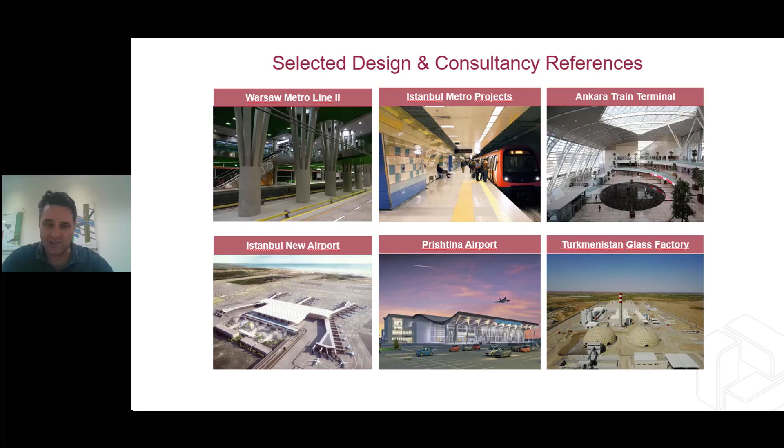Some of the interesting projects we've been involved with over the years: the Warsaw Metro line in Poland was an interesting job. We've done almost all of the metro lines in Turkey - we're one of the biggest providers of design services there. Recently we were also involved with the new international airport in Istanbul. So there's an interesting range of mix of jobs we've been involved with, and this has helped shape the way the software has developed over the years. It gives you some insight into what we're doing in practice, and you can see we're also delivering projects just like you.

So there's an interesting timeline for what we've been involved with. In fact, the office started back in 1985, and we started commercializing software in the early 90s. In 2000, we had what was then the global release of a product called Orion. So we commercialized the software we had developed in-house in the early 90s, and it culminated with a product called Orion, released in the early 2000s.

We were one of the first to introduce bidirectional integration with Revit, being a physical modeling system. We started this process back in 2007, and continued to develop that platform for many years. Then in 2015, we redeveloped the entire suite of products, which became known as ProtaStructure. This has evolved tremendously over recent years, and we're now in a position where we're in the process of completely redeveloping a whole new platform, which we're very excited about and will be launching very soon.

So watch this space. We've got about 300 people on the design and development side of our business, and we support a range of interesting businesses across the world. I think there's over 10,000 people using our platform on a daily basis, supported directly by us and our valued partners in over, I think, 17 countries now, if I'm not mistaken.

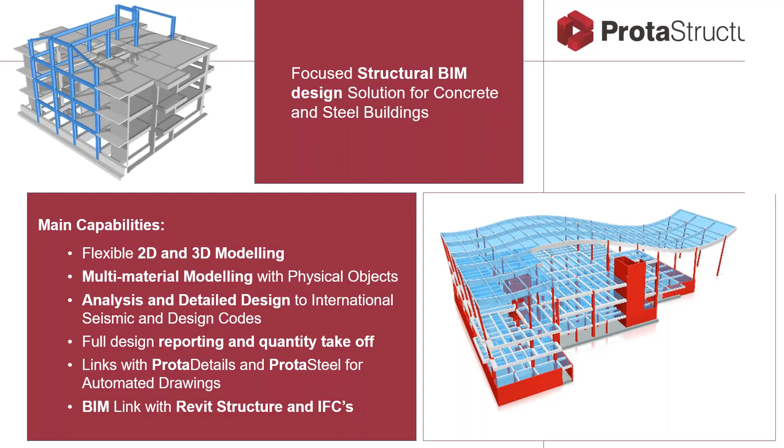Now, I think people like it because users tell us that it's easy to use, and it also helps with driving productivity.

Sorry, I'm getting some messages. I think you can see my screen on the side. I don't know how to minimize this. Okay.

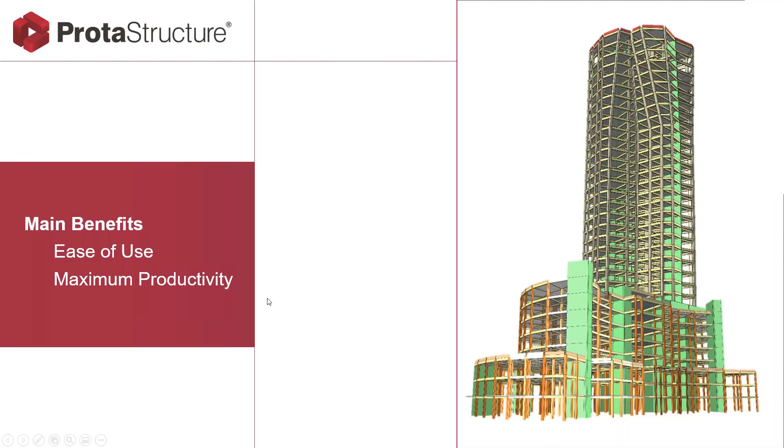Now, just give me a second. I know you can see my screen on the side. I'm just going to kind of maximize it, and then I'm going to try and minimize my screen again and see if you can't see it. Okay. All right. Hopefully that's hidden it. I'm getting messages from my team here as we go.

So today, this topic is on flat slab design and ProtaStructure. Now, what do we mean by flat slab design, and why flat slab design? Okay. Well, perhaps you can tell us what that might be for you.

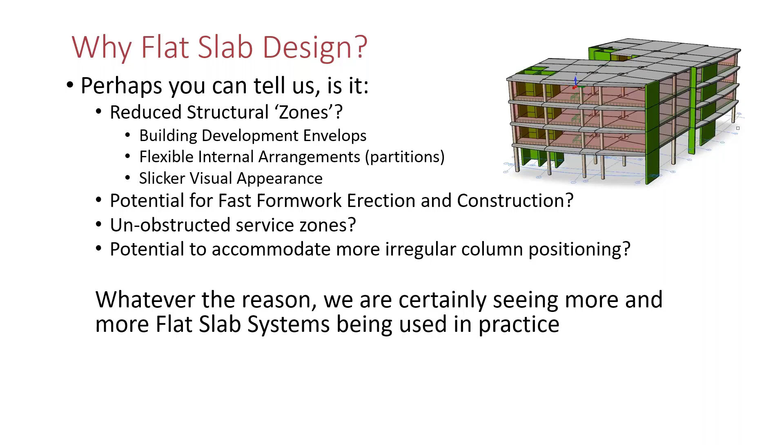So that may be related to reduced structural zones within your developments. That might be to comply with stringent building envelopes and trying to maximize space within developments. It may be to provide flexible internal arrangements where the architect wants a free hand at how partitions and so on are provided within a building. Maybe just to give it a slick visual appearance, again, an architectural requirement. It may also be for construction, and you may be wanting to erect buildings quickly. You want to minimize the amount of formwork that you're using during construction. You may want unobstructed service zones. And there may be even a requirement to accommodate more irregular column positioning. Again, there may be other architectural considerations. So whatever it is, for whatever reason, we're certainly seeing more and more flat slab systems being used in practice.

Now, what do the codes say when it comes to flat slab design? Well, if you review both the Eurocodes and the British standards, you may know that there's what we would call a simplified method for being able to design a flat slab structure. And that looks at creating an idealization where you would look at identifying your column strips and middle strips. You can then build up a simple subframe as you would with any other, say, general analysis software for beam and columns as a simple model. And within this, you would cater for things like pattern loading, and maybe you're also considering moment redistribution.

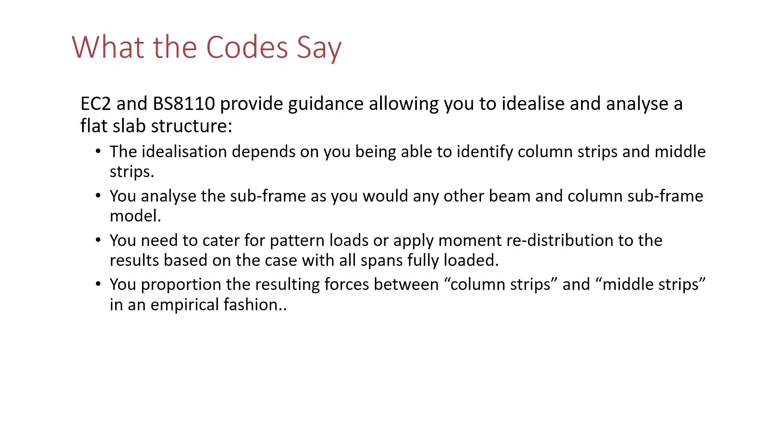Okay. And then what you would then do is take those resulting forces between the column strips and the middle strips, and you would distribute those empirically. And the code provides guidance on this. So in a very simplistic way, I could take a scenario here where I've got my column strip, my middle strip, and we would then create an analytical model.

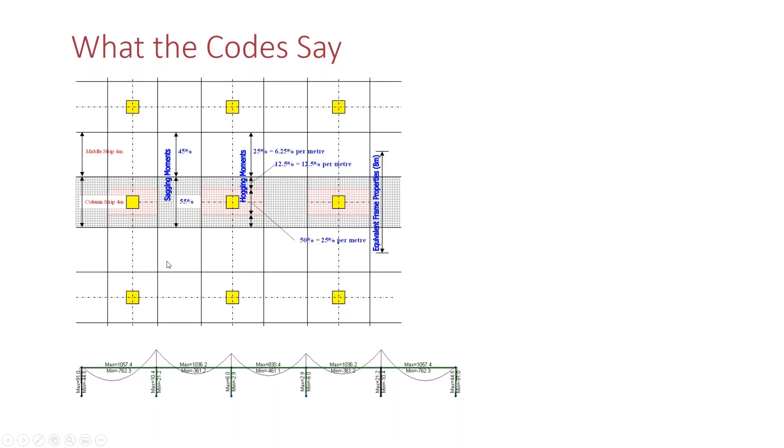We would load this up with the loads that were applied across these zones. And the code then would give you ratios in which you would proportion them to your sagging moments and your hogging moments, and between your middle strips and your column strips. So the code would provide guidance on this. And if you referred to the BS and Eurocode standards, you'd see that there's guidance available. Now, this is really actually an idealized approach to what is done with FE models.

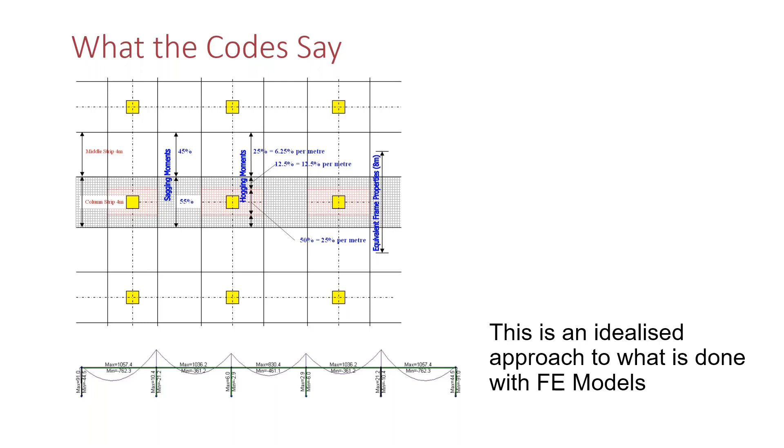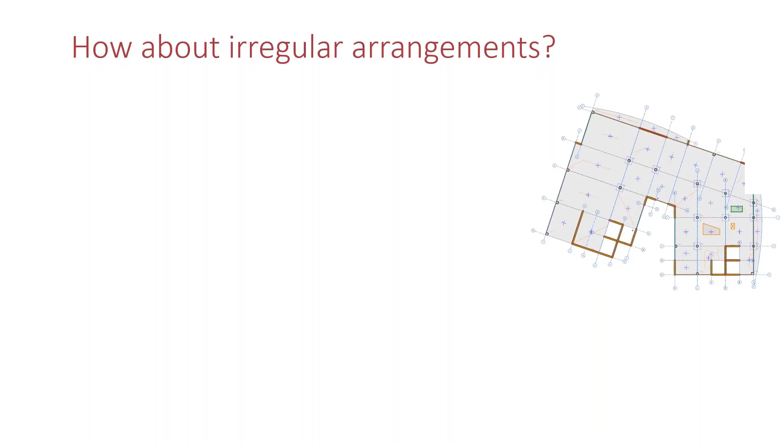So what they've done with the code is taken what might be a real life situation using finite element analysis and created a more empirical way to do that. But what about irregular arrangements? How about if your model's not a square box and you've got irregular arrangements that you need to consider within the model? This is where finite element comes in, and as practicing engineers we're increasingly having to deal with larger and more complex models. Finite element analysis is really the only practical way we can effectively deal with these scenarios.

Now, there's three main considerations with flat slab design that you need to be aware of. Deflections is a key consideration, and treatment for those within the analysis and design process. Bending in relation to area of steel and localized design, which I'll get to. And we also need to consider punching shear as well as local bearing. These are probably some of the key considerations you'd need to be aware of as you're designing a model of a flat slab project.

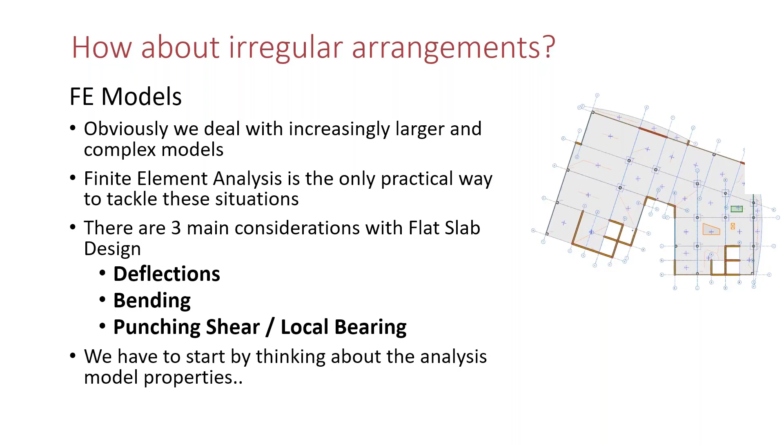Now, I think the first place you'd want to start looking at is the analytical model properties. One of the key considerations is deflections, and for the analysis model we need to think about what appropriate member or section properties to use. The British and Eurocode standards suggest consistent properties, but is that correct for deflection?

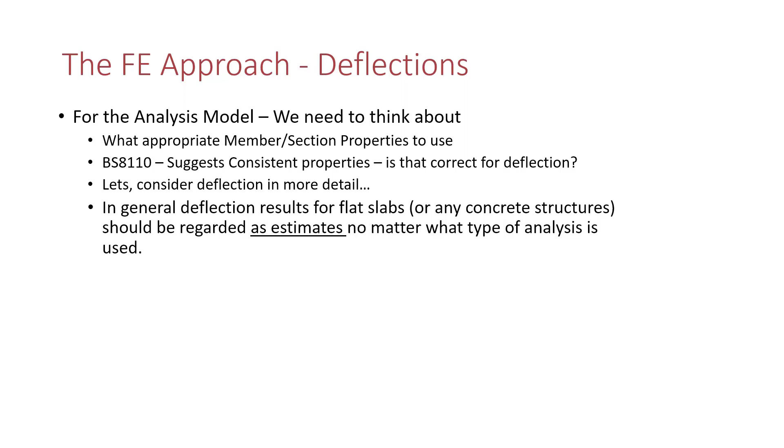If we look at this in more detail, we'd know that in general, deflections for flat slabs or any concrete structures should be regarded as estimates, no matter what type of analysis is used. This is largely due to the material properties you may consider. If I just took a typical grade of concrete, say grade 40, your E value may vary quite significantly, and this can be due to construction methodologies, perhaps the times you're striking your formwork, the quality of aggregate and materials on site. There's a number of factors that can affect your E values.

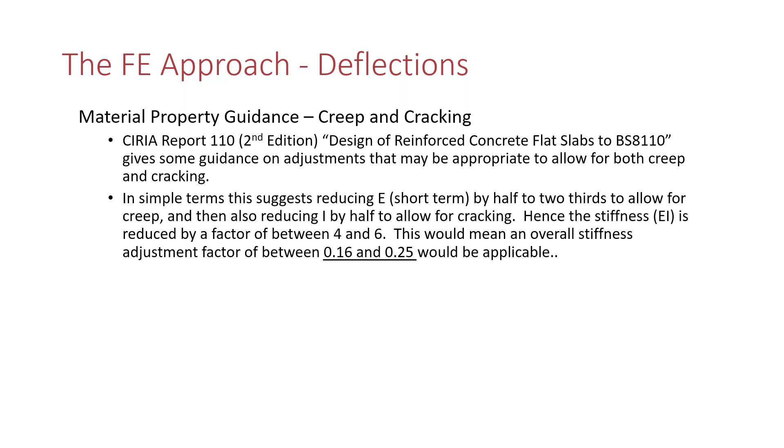This in short also has an impact on deflections. What we have to do is modify the stiffness to allow for this, and in particular we need to allow for both creep and cracking. So what do we do? There's been research done in this area, and one report I'd point you to is CIRIA Report 110, the design of reinforced concrete flat slabs to British standards. You can also refer to similar guidance in the Eurocodes on adjustments for creep and shrinkage. In simple terms, this suggests reducing your E value or modulus of elasticity by up to half to two-thirds to allow for creep, and reducing your I by half to allow for cracking. So in effect, we're adjusting your EI value, reducing it by a factor between 4 and 6, which would typically relate to a final stiffness of between 0.16 and 0.25.

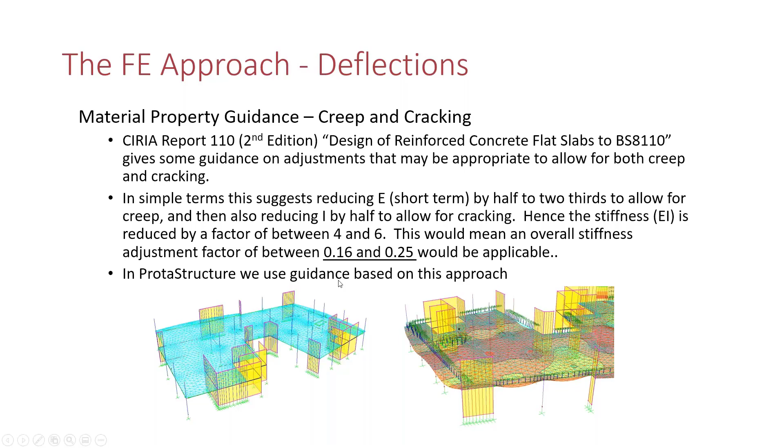And this is the type of guidance that we can follow within ProtaStructure, and I'm going to talk a little bit about this as we move through.

Now, obviously also, in addition to deflections, we also need to consider bending. The code guidance I talked about earlier is great for regular slabs, but it breaks down for irregular arrangements, as we talked about.

There's two ways in which we can deal with bending. One is that we can look at area of steel contours using finite element analysis. And we can also interrogate or interpolate those contours to give us some sensible design values, and one way we do that is with integral strips.

Now, if you're familiar with the code, you'll realize that when you have things like columns and positions, moments approach the columns and will peak. The code has provisions to allow you to average moments across those peaks. You don't need to take the full values.

Typically for a column zone, you will have an inner column strip and an outer column strip. Code guidance typically allows you to look at the typical spans between columns, and integrate across those column zones by taking those spans and looking at 25% of that span across the inner column strip and 12.5% either side. So in effect, we're averaging out the moments across our column zones to provide a more economical and reasonable design based on code requirements.

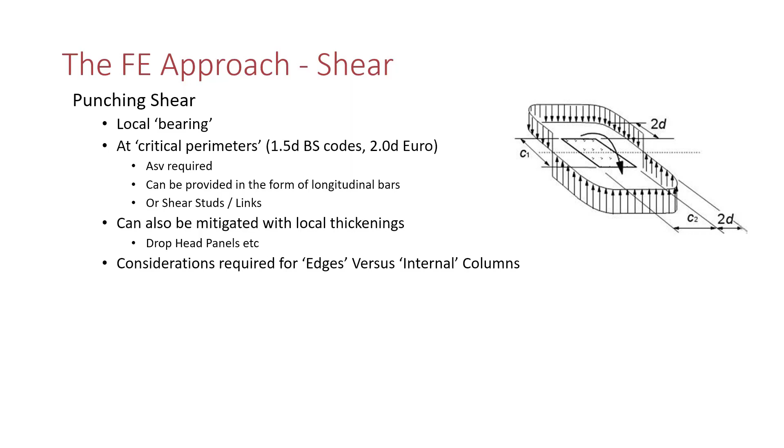There are also separate considerations for edges versus internal columns. If I have columns sitting on an edge or on a corner, the way these are treated is different from how we would treat an internal column. You may also need to provide local consideration for walls in particular, since with walls you can have local stress concentrations due to localized bending, and there may be times where you need to look at this independently.

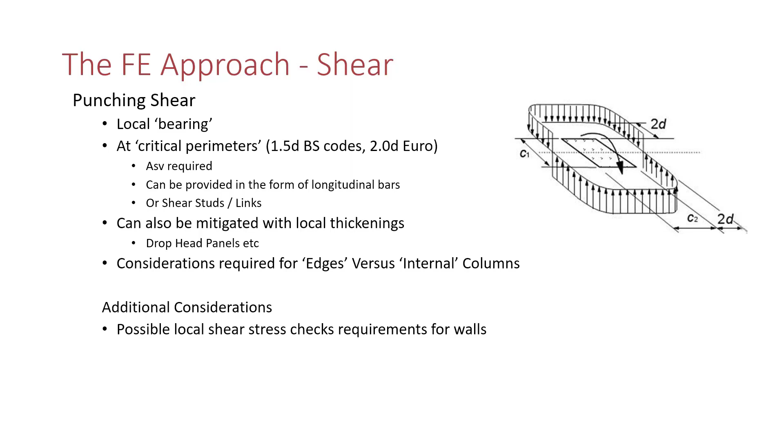We take the shear forces, and the code requires us to make adjustments to calculate an effective shear force, called VT. Depending on the scenario, the software will make these adjustments for you. The maximum adjustment in the British code is for corner columns, at 1.25. In the Eurocodes there's quite a complex formula where magnification factors are adjusted depending on positioning as well as openings, ranging from 1.15 through to 1.5 for corners. So in the software we make these considerations and adjust our shear forces to cater for both shear and local bending at those joints in different directions to calculate the effective shear force.

Punching shear perimeters are also an important consideration. As I mentioned, you can have different perimeters depending on where you are. Obviously if you're on the edge of the building you would check for perimeters on the edge, and corners again will be checked. We will automatically calculate these and provide effective perimeters for checking.

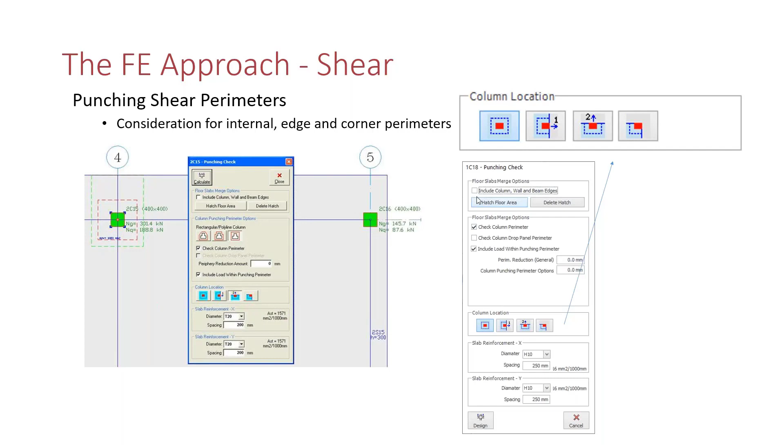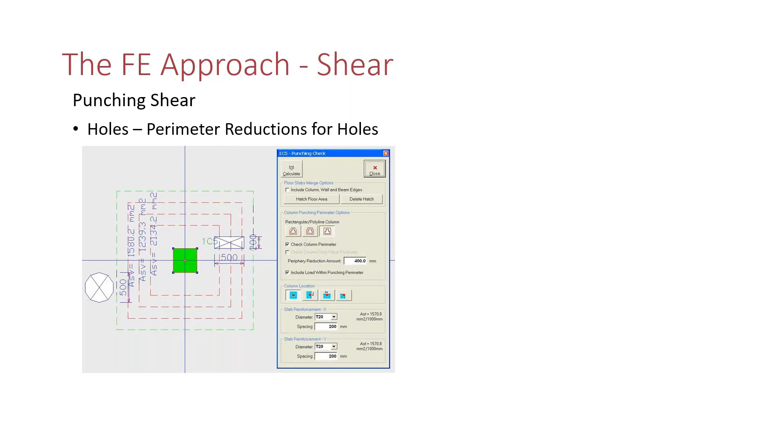The final important consideration within flat slabs is the introduction of openings. You could have openings adjacent to columns and column zones, and you need to consider those within the software. We will look at these and make reductions to shear perimeters to cater for them, doing some quite smart things in terms of how they're considered. So I've summarised some of the key considerations for flat slab design. I think what I'll do now is get into the software and show you.

So I've got a model arrangement here. I've imported this as a CAD file, and I could bring in my grid lines and layouts directly from a reference drawing. At this point I've already established my column positions and the like, and I'm just going to take this and start to create my slabs. To do this, I can key in my thickness, so I might start with a slab that's 275 thick.

I can also come and define my load, so I'm going to put in my superimposed dead load. If I'm not sure about live loading, there's guidance here based on the code that you can draw from. I'm going to assume this is an office building, but obviously we can manipulate that. The way in which we insert slabs can be done in a number of ways - if you had a frame model it'd be by beam region, but I'm going to choose axes region to come and create my slab panels.

You can also pick axes and pick points to create these. So let's just start to put in some slabs, and you can see here I've just created some slabs there. If I hit Control, I can just choose a panel and create a slab.

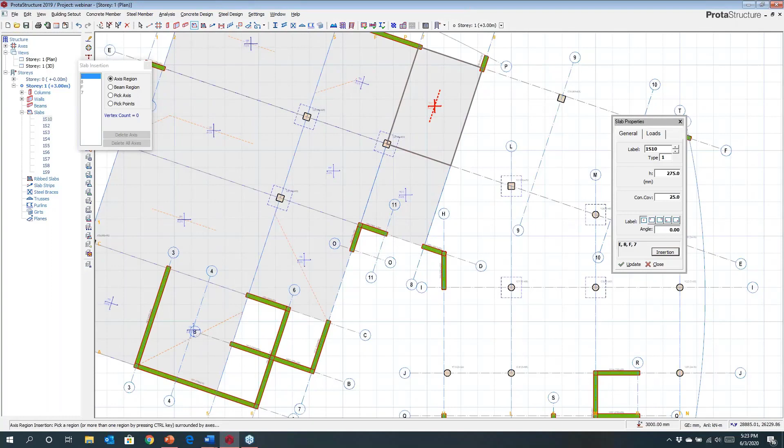Now as you're going, don't worry about the yield lines getting created here, we're not interested in those for this example. I'm just going to run around and create my slabs as I go. They're being defined by the axes boundaries we've created. If you've got curved positions, they can be created by defining curved grid lines to set these out.

You can, as you go, make changes. So if I decided that maybe in another part of the building the live loading is a bit higher, we can come and define those as well. So let's just run around and put our slab loads in, slab panels in. I'm just coming here and defining a few more. Let's just quickly create these.

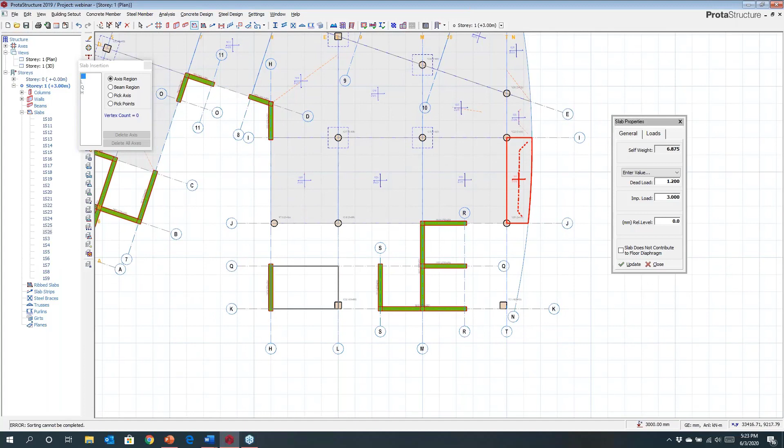I'll hit Control again and put a panel in here. You will establish your panels in a way that's sort of looking at bays. Now the reason we do this, instead of creating one entire panel, is that we have to consider things like pattern loading, and I'll get to this shortly. So I've come and created a zone here.

I can at this point come and check this, so I can use my visual interrogation manager to check my basic loading. You can see here for the live loads, I've got 2.5 and 3, so I can just visually check to make sure that's okay.

What I can also do at this point is check my pattern load variations. If you click on this, you can see that we will define different pattern load variations in plan, and you can see the different variations here that can be used by the software. This is quite a smart way of being able to pattern load panels.

Traditionally, you may have been making adjustments to your pattern loading to take into account these effects within the design. Typically, with FE analysis, this is not available, but in here you can make adjustments to these.

This is a checkerboard, so you can turn pattern load variations on and off. If you wanted to make adjustments to look at different patterning, these can be easily defined. The idea here is that we can create a checkerboard of the different permutations you may come across within a project.

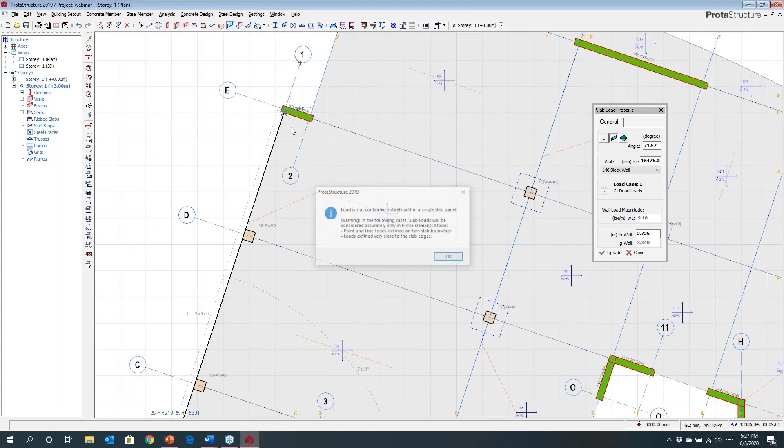Now you'll notice that I'm covering multiple bays, and the software has just advised me that to consider this properly, we need to use finite element analysis.

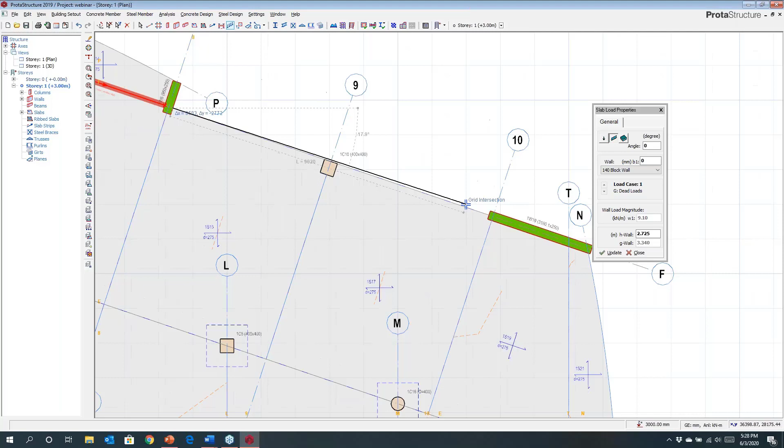So you can be as accurate as you want with this. You can see that I'm just loading to the face of a column or wall, or I can pull the loading all the way through. This is entirely up to me. We can just come and set this up to suit.

I'm just running around here, let's put these perimeter loads for the walls in. Let's go to there, and I'll just finish this off. Just give me a few seconds and we will be done. So again, this could just be my perimeter wall.

You can do a similar thing with your internal partitions and just apply that loading to the building.

So we'll run around a few more, and I think we're done. Okay, so you can see here I've just come and created that loading quickly.

There are other things you could consider here as well. Maybe I've also got a plinth that I want to include, or some local loading within the slab. That can also be defined here. You could also come and introduce other considerations you may have within your building into the model.

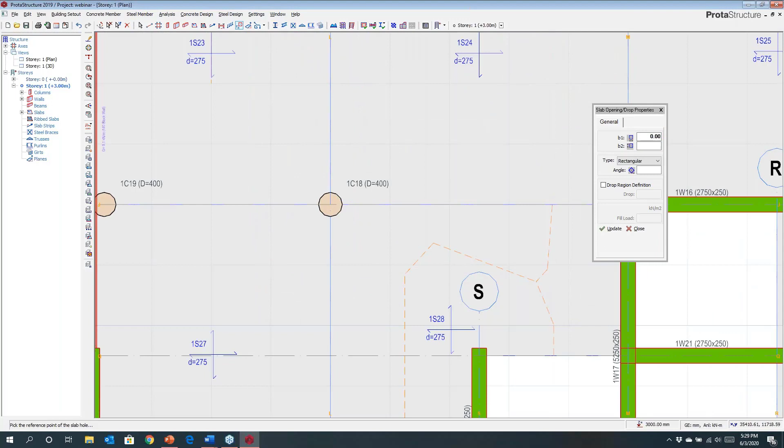One of the considerations I touched on earlier was openings, and I'm going to create an opening that might be for services just adjacent to that column. You may, as part of the model, want to tighten up the architecture by doing other things within the model.

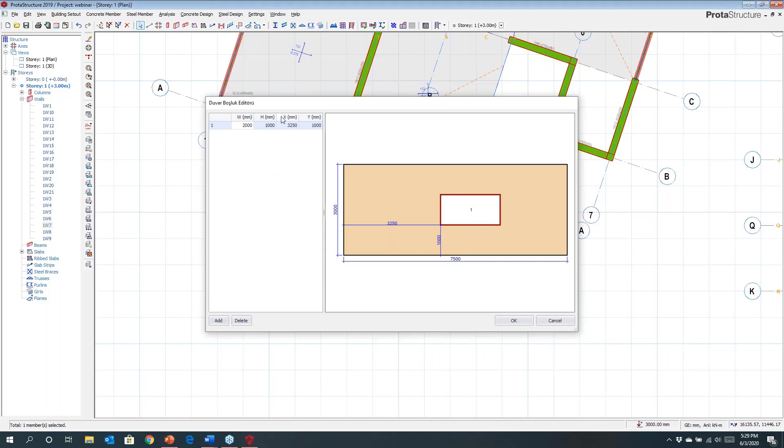You may have openings for things like walls that you wish to define. I could just come in and do that - maybe I want to put an opening in the wall there, and I'll just adjust the position. These types of things can easily be adapted within the model.

At this point I'm going to show you a 3D view, so you can see I've created what is a subfloor here. You can see my floor view, my walls, as well as my partitions. I've got a few column drop head panels there - they can easily be created within the model.

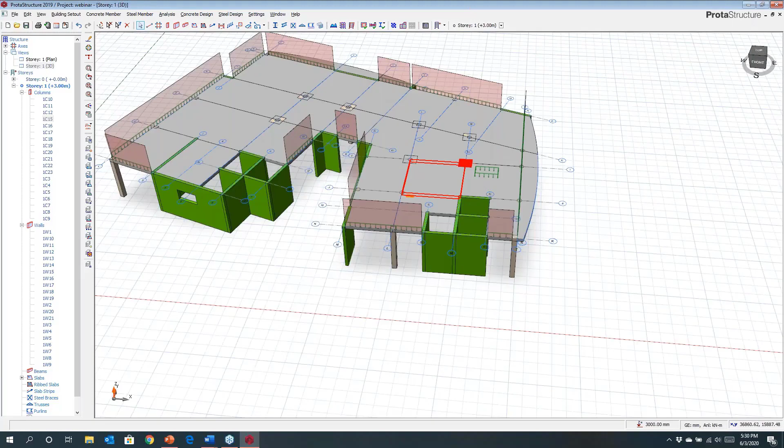If I just look at the properties of any column, you can also add those in here, so you can feed the dimensions of what you want to create for the drop heads, and they can be included as well. You'll just choose the zones where you think they may be a consideration, or you might not include them at all.

Now I'm going to come in and generate some stories - let's just insert a few floors. Let's make this a 4-story high building, and we can come and just generate that upwards.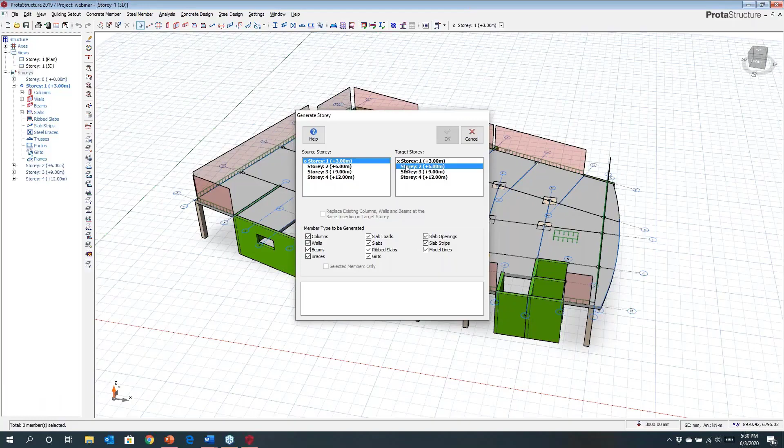So I'm going to take that floor and copy it up the building, generating this information upward. You can choose what you want to copy - if you didn't want to copy some of the slab loading we defined, that could be removed. It's entirely up to you how you want to do this. So you can see here I've created up to 4 floors now.

Now I'm going to select the roof level because I want to make some changes to the model and tidy this up. I'm going to remove my slab openings and my slab loads for the roof. I'm just going to assume I've got the live load acting there on the roof, and that may be sufficient for this example.

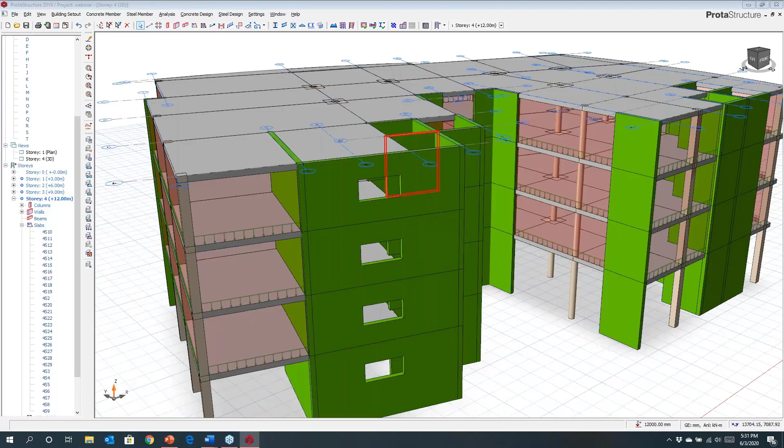So I've quickly come and created the model here. You can see I've got a few openings in the walls. You can visualize the model here and just make sure it's what you would like to proceed with.

At this point I'm going to save the model, because I want to start to populate the geometry, and I'm going to use this for creating wind loading. The software will then be able to establish the extents of the building, and I'll then be able to apply my wind loads to this.

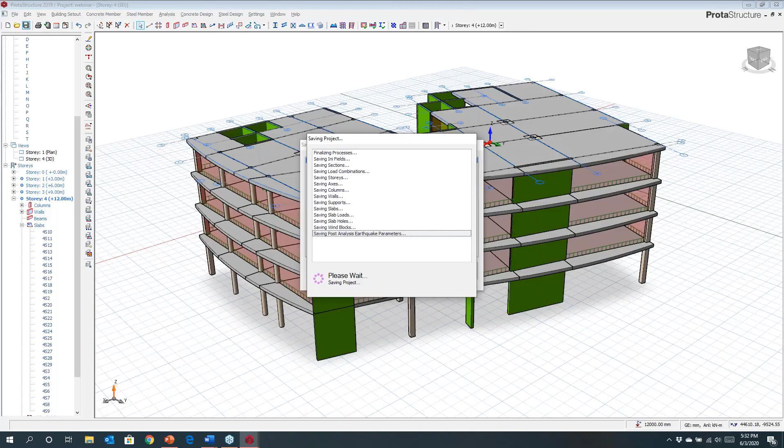Just give it 1 second and we'll be done. Then we can carry on with moving into the analysis and design processes. So we're done now, let's move in and start to look at how we might go about analysing and designing this.

Now today's session I'm designing this to the Eurocode, so you can select the codes of practice you wish to use. You can also come in here and predefine the grades of concrete and steel that you may wish to employ within the project.

Now I'm also going to establish my combinations here, and generate them. Earlier you saw me create some pattern load variations - I'm going to set those here as well. I'm also going to create an unfactored case because I may want to look at unfactored deformations.

Okay, I also want to establish my wind loading cases here. Wind loading and notional loads, which are considered concurrently per the Eurocode, are created here as well. If I hit OK, you can see the software has generated all these different combinations automatically for me.

That's been established. Now I'm going to look at the model options for the building. I'm going to assume that my walls are going to be meshed, and for this example, I'll also assume that all my slabs are meshed as well. So I'm going to mesh the entire building, walls and slabs.

Now I'm going to turn on the diaphragm. So I'm going to assume that the slabs are going to act as diaphragms, and the in-plane stiffnesses of the slabs can be managed here as well.

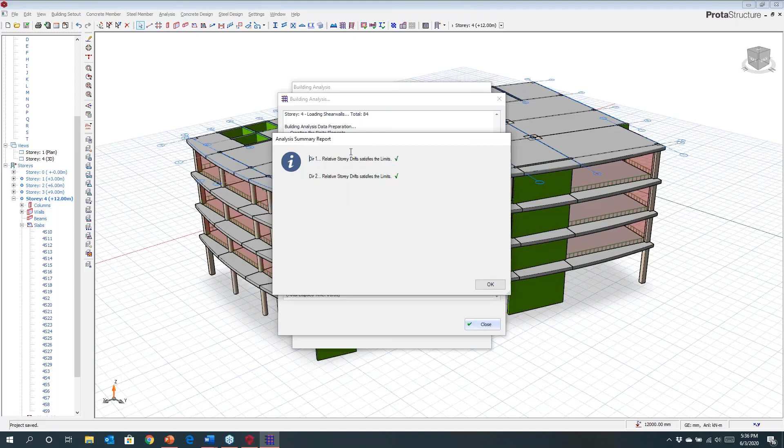So this is done, and we've also checked concurrently the inter-story drift checks, which has satisfied the code, and we've now completed the analysis.

So if I close this, I can then take a look at the post-analysis results, and I'm just going to quickly look at this within the context of our 3D post-processor. Let's give it a second, that will load this. Okay, and then we'll be able to review the results.

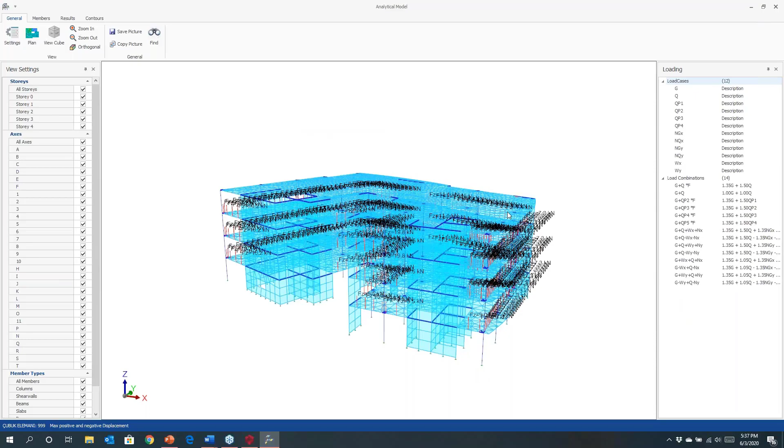So here you can see the model. I've meshed the entire model here, and we do some quite smart things with the meshing. I don't know if you can clearly see my model, but the way in which we mesh boundaries is very important - we will mesh them so that you can see all the nodes are matching. So the slabs will meet the wall nodes, and that will provide an effective transfer for our stresses.

Now I can start to look at various results in here. I may be interested in looking at the analysis results for, say, axial load. I can come and interrogate those, and you can see those results clearly there.

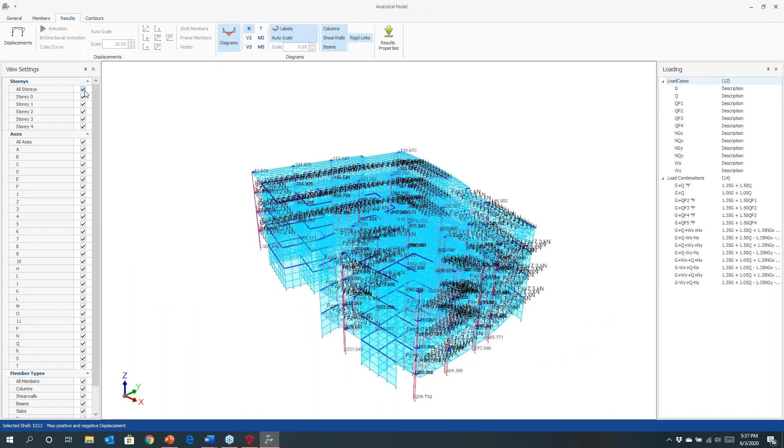If you wanted to just filter out a floor, maybe I'd just like to see the first floor, for example, we can come and look at that in more detail.

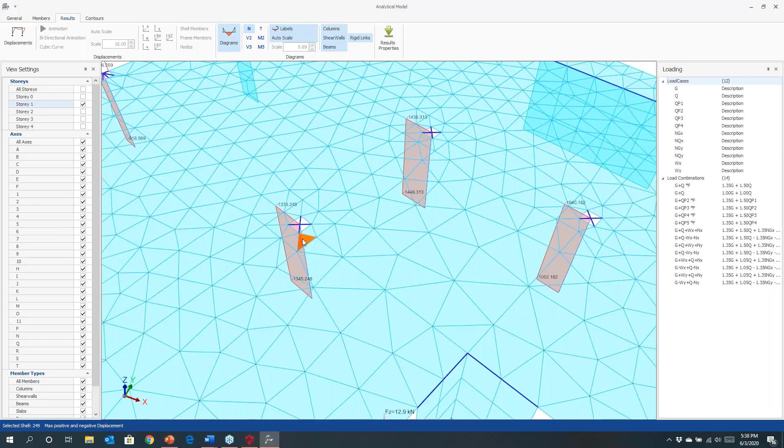Now, the other thing you might notice is that we've also meshed to the boundary of the column. So the actual extents of columns are provided, whether they are circular, square, or whatever shape, and we will build rigid arms within these zones and mesh to the faces. This can provide an additional degree of economy and perhaps a more accurate model in terms of behaviour.

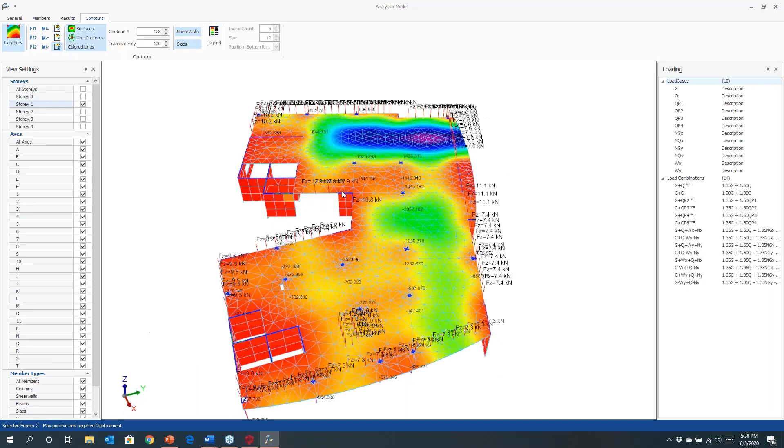I can, within here, take a look at some preliminary contours, and we can look at the behaviour of the slab as part of the overall building if we wish, and you can see those results here as well. But maybe what I want to do at this point is just come out from here, and we may want to individually look at this in more detail.

Now at this stage I can also get straight in and we can design the columns and walls. So right now, before I even move into looking at the flat slab design in more detail, I can start to produce information from this.

We've included the slabs and model in one complete model. We've looked at all the global behaviour of the structure, and we can now move in and start to design and even detail some of these elements out before we get too far.

So you can see there it's just finishing off the column design. Just give it a sec, it's quite quick. We've done nearly 160 odd elements, and they're all designed. You can see there that all the various checks for the columns have been performed.

If you want to look at the status of the column design at any point, you can go back to the visual interrogation and have a look at this. So if I'd like to see whether everything's been designed, I can just click on that, and you can see that they're designed.

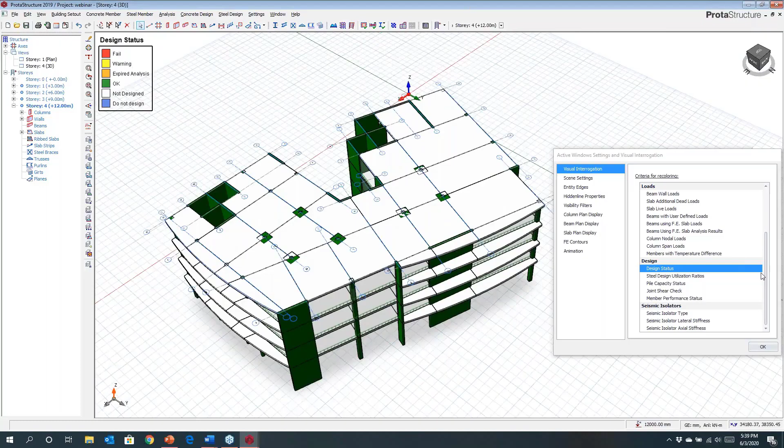Now, even at this point in time, I may want to do some preliminary documentation of the model. So to do that, I could just go straight out to Prota Details and start to create some output from the model. It'll just save this and it will launch Prota Details.

Maybe we are just wanting to provide some preliminary information to site. We may be wanting to start construction processes where we've designed the foundations as well, and we're providing the first storey column design to get the project going. At any point you can come and start to document out from the model.

So I'm just going to show you a little bit of this within Prota Details. Prota Details is not the focus for today, but I just wanted to bring it in to show you how some of this documentation might start to happen.

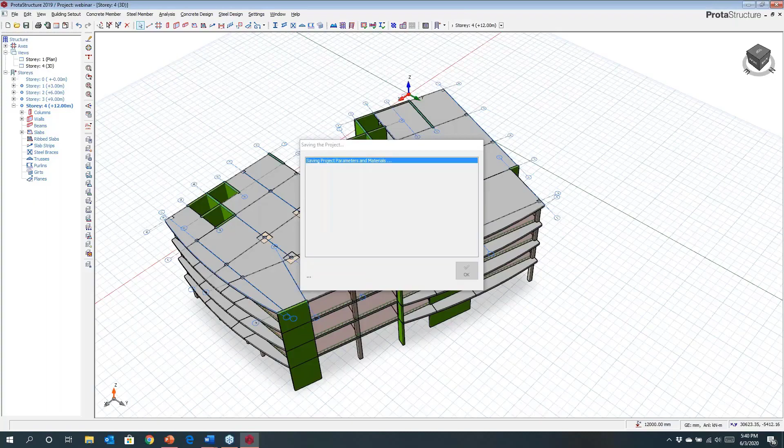So Prota Details is launching, and then we can start to produce some of the output.

So I'm just going to automatically generate some of this. Let's just choose to create some basic information. I'm going to set it to sheets, and then we're just going to ask it to draw. So it will come in and we can draw up the information we have just been creating.

So you can see it's populated here with my title block, and it's now starting to prepare some of that background information. At this point, we may want to create some key plans. We may just want to create our column detailing and wall detailing. This can be generated out at this point in time.

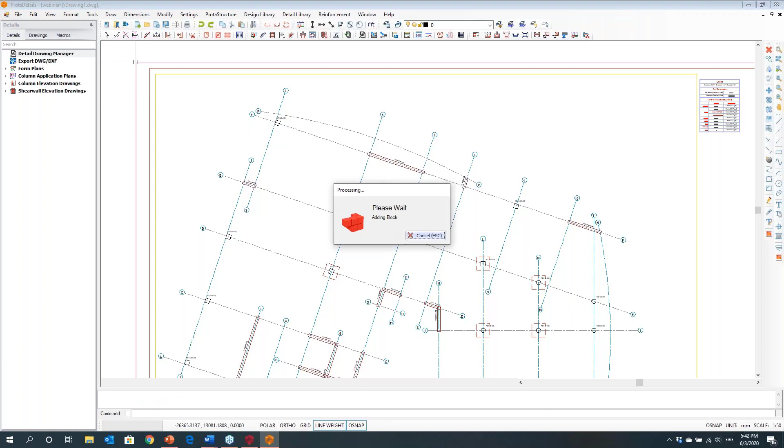So not to slow the overall design of the project down, just give it a second. A few more columns and walls are being created, and then we can have a quick look at the output here.

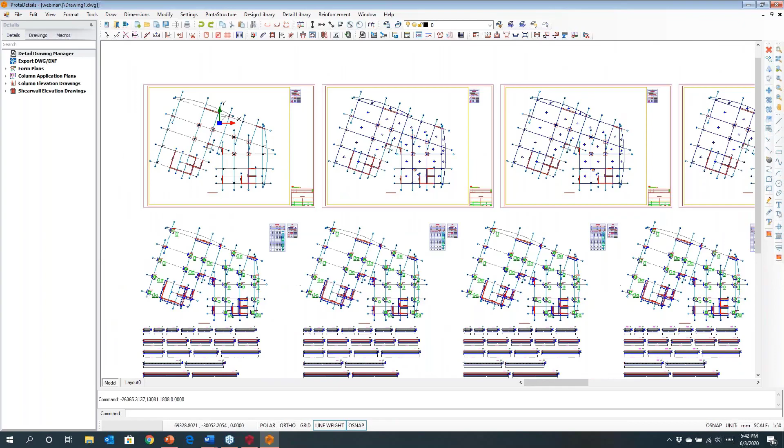So here you can see that we've come and created the key plans there. You can see my column drop head panels, my core walls and the like being drawn, nicely placed into title blocks. You can also see things like set out plans, so you can see column and wall details there, and they can be placed in title blocks if you wish.

You can also see our elevations there, together with that little opening that I created in that wall earlier. So this is just some of the output that you can expect from the system. Now let's get back into the ProtaStructure model, and let's start to look at things in a little bit more detail.

What I'd like to do at this point is move down to the first story plan, and I'm now going to run the finite element analysis for this floor.

Now, for pre-analysis we need to establish some conditions, and one important thing I alluded to earlier was cracking and creep. We can consider this within the model, referring to that earlier guidance where you key in basic typical dead loads and typical live loads, and we'll give you an estimate of the suggested range to consider for crack and creep.

As I said earlier, it is very subjective, and will depend largely on the nature of the structure. If it's used for storage, these factors will be higher. For office and domestic use, the range will be lower. It'll also depend on the quality of construction, how you're propping, and similar considerations. But as a general guide, there's a recommendation of adjusting the factors between 0.28 and 0.31 of our EI value. For this one, I might use 0.3, and we will then make those adjustments to the stiffness factors.

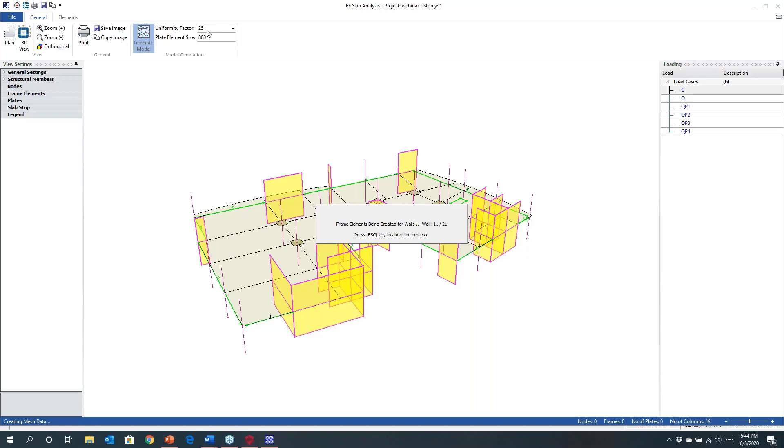At this point, I can come in and mesh the slab. It's now going to take those properties and mesh just this floor as a subframe floor. If I click on meshing, you can generate the mesh. You can also play with the mesh uniformity—the meshing is adaptive, and you can adjust element size to provide a more dense mesh or less so, depending on your requirements. The meshing is adaptive, so as you get closer to things like column heads, the meshing will be more tightly spaced, and as you get to mid-span, it will be further apart.

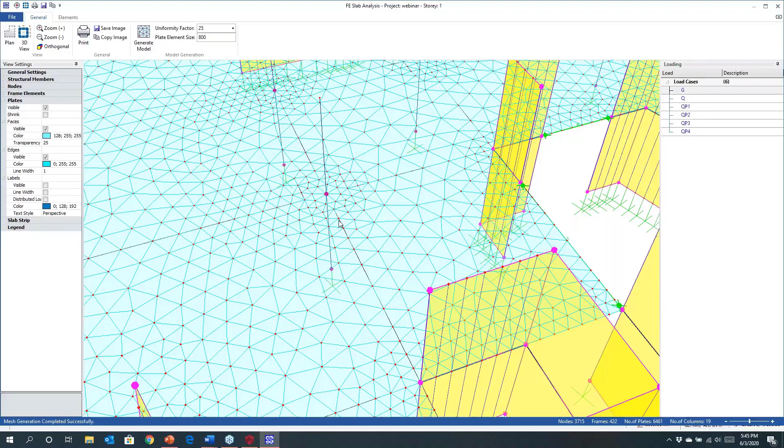People might ask, why are we using triangular meshes here and not quadrilaterals? The answer is that especially near column heads, moments are increasing, and we need to interpolate between points. A triangular mesh allows us to do that and trap out peaks, whereas a quadrilateral mesh is not as effective, and trapping those peaks becomes more difficult—sometimes you can miss them. So this is why we tend to use triangular, or a combination of triangular and square meshes within the slab, and we use square meshes within the walls, which are more effective at dealing with shear.

So I've now generated that model. If I close this down, it will run the analysis and perform the stress analysis for this particular slab. We're just going to run it as a subframe, and we can then come and have a look at the results.

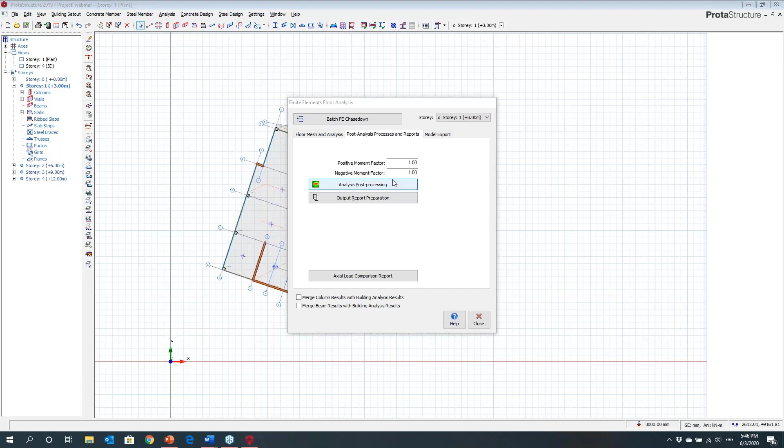If you did want to make adjustments at any point to things like moments—perhaps you're not entirely happy with how it's catering for all the different pattern load variations—you can make adjustments here, adjusting the negative or positive moments accordingly, if you want to introduce a degree of conservatism. This is up to you, but that option is available here.

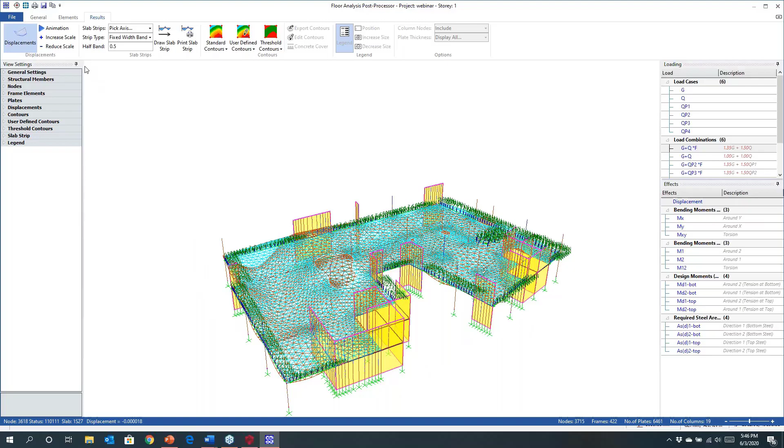I'm going to come and have a look at the output now. You can see here that we've meshed it, and I've got some quite exaggerated displacements on view. I might just reduce those, and I'm going to look in particular at the service cases. You can see all the different cases as well as envelopes on display, and you can choose what might be appropriate for you to review.

And I'm going to have a look at some contours. I can view this in 3D perspective, or within the elevation view. You can see that this zone off to the top left is where I have the most excessive deformations. In this scenario, I've got a deformation of 23 millimeters as an ultimate long-term displacement, and I may or may not be happy with that level of displacement—this is up to you.

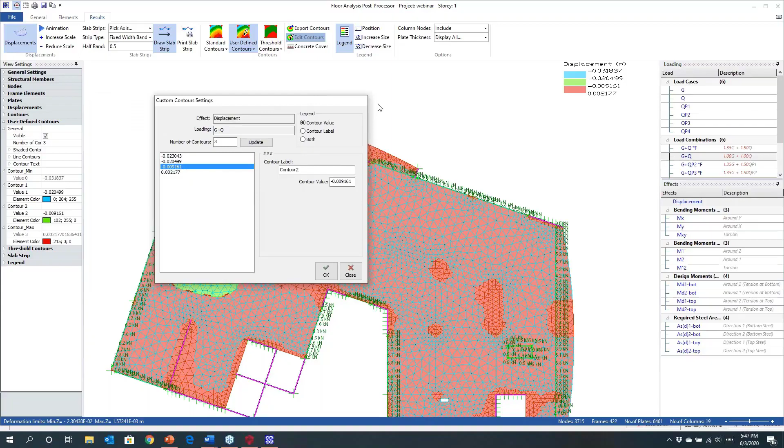You can come in and provide user-defined contours to map maximum allowables you may wish to establish. I'll use a threshold contour here, and say that the maximum displacement within the slab I'd like to accept is 20 millimeters over that period, and it will show parts of the slab where that may be exceeded.

It's not an exact science. It will depend on the spans you're looking at, and you'd need to use some engineering judgment as to what you'd consider acceptable, in accordance with the code guidance for the type of building you're designing.

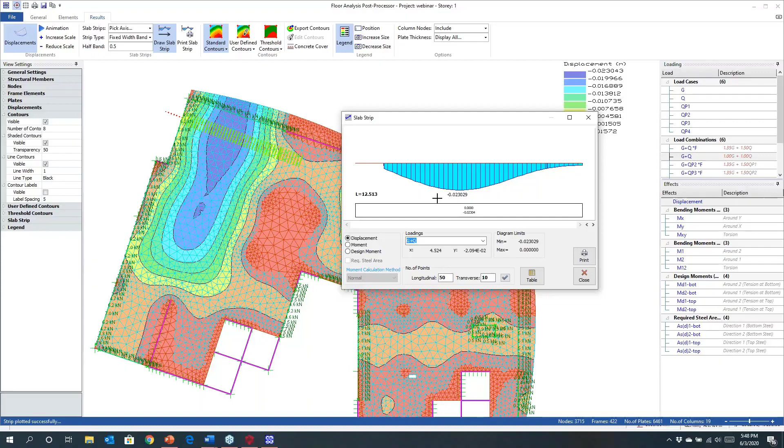Another way to look at deflections is to use strips. I'll cut a strip through this part of the model, and the deflections along that strip are resolved. You can see a displacement of 23 millimeters indicated for my dead plus live case. I may be happy with this scenario given it's a long-term case, and maybe I've also introduced a bit more propping. This is entirely up to you.

Along the right here, in addition to displacements, we can also look at other effects, like moments on the slab. You can see moments in the X direction and the range of moments we have, as well as in the Y. You'll also notice MXY moments, and these are torsional moments—our Wood-Armer effects, or torsional bending within the slab.

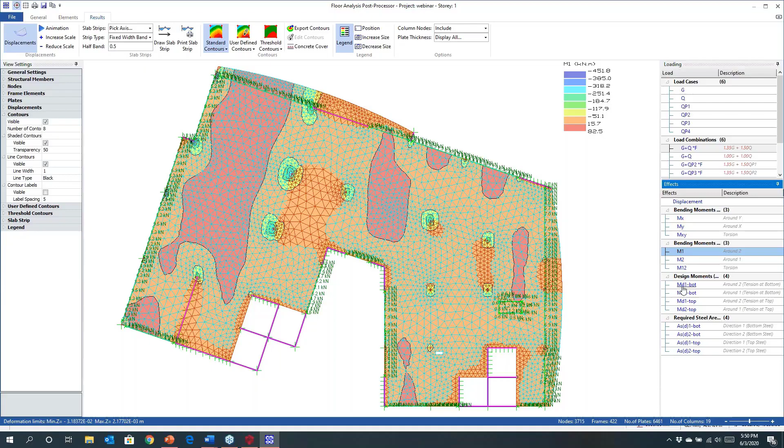We take these Wood-Armer effects and resolve them into X and Y for design, so you can look at moments both globally and locally, orientated differently depending on what you want to see. There are also design moments, broken into moments in the X and Y directions at the bottom, and moments in the X direction at the top, as well as the alternative direction. You can view these to get a feel for peak moments within the slab.

The final interesting thing is that we also concurrently have area of steel contour plots. I may wish to look at these and view the maximum envelope within the slab. Here I can see a range of steel from 0 up to 1,115 millimeters squared per meter.

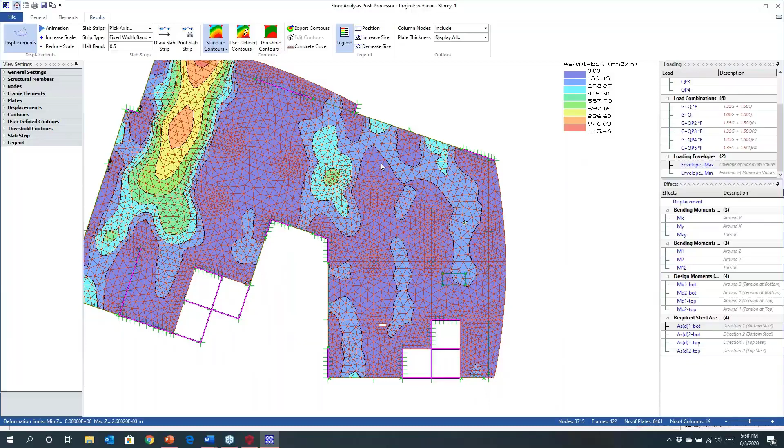We may also want to make adjustments for the slab. These area of steel contours are calculated based on a predetermined concrete cover and a basic steel bar size. I might use a minimum 12 bar in this project, so I can set this here, and we'll adjust the effective depths in X and Y directions to be considered for area of steel requirements for bending. If I make that adjustment, you'll see these diagrams change very slightly.

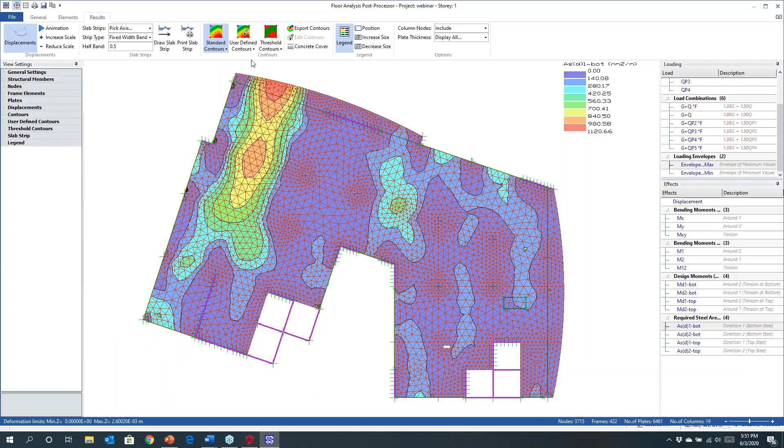Now, what do these mean, and how can we interrogate these results? I can see this range of steel, but what does that actually mean in practical terms? The advantage within ProtaStructure is we can use these to lay out predefined contours.

I'll choose my user-defined contour plot and go to edit contours. Here I've interpolated a range of different contours. Depending on the scale of the moments and forces in the slab, you may wish to have more contours—entirely up to you, depending on the nature of the project. You can use this to predefine some basic steel. For my bottom steel, I might decide on a minimum bar arrangement of H12s at 250, and I'll ask it to create an interpolation line based on this criteria.

Now, you can see that that's covered almost all the slab here. There's just a little bit that's not covered, and I may decide that for those other zones, I wish to use a little bit of extra steel. I'm going to use maybe one layer of 16s at 250.

And I may have another layer of, or we may keep the same layer of H12s at 250 as well. Okay, so if I update this, let me just check that, make sure I've got that checked. Do that again. Okay, so you can see that this range of steel here is slightly more than the maximum required in the bottom and the X direction.

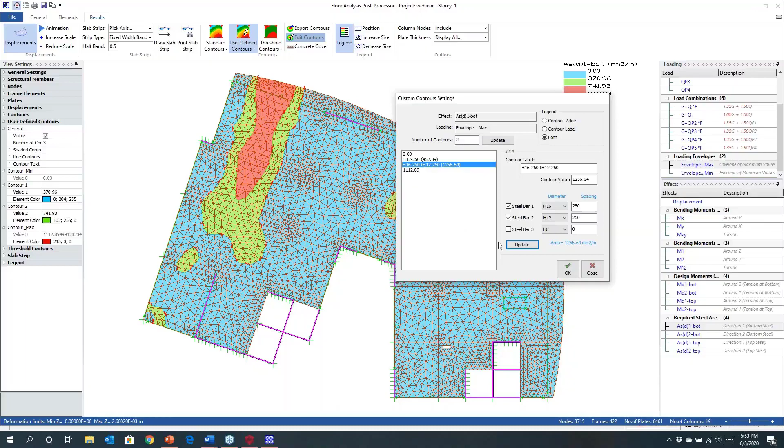So if I hit OK there, you can see very clearly now that I have a baseline steel, which is the 12s at 250, which is being used throughout the bottom in the X direction. But locally in the green zones, I need a bit of extra steel, and this is where I need my H16s at 250 plus H12s at 250, and these may be alternating bars at 125 centers. So I know exactly the location of where that reinforcement may be required in the slab here.

Now, if I wanted to, at this point, I could export these contours, and we can then view these contours on top of a model within ProtaStructure, and we could interpolate from those for laying out our reinforcement. I can look at this in other directions, so we could also apply the same thing for the other direction in the Y, and we could do this.

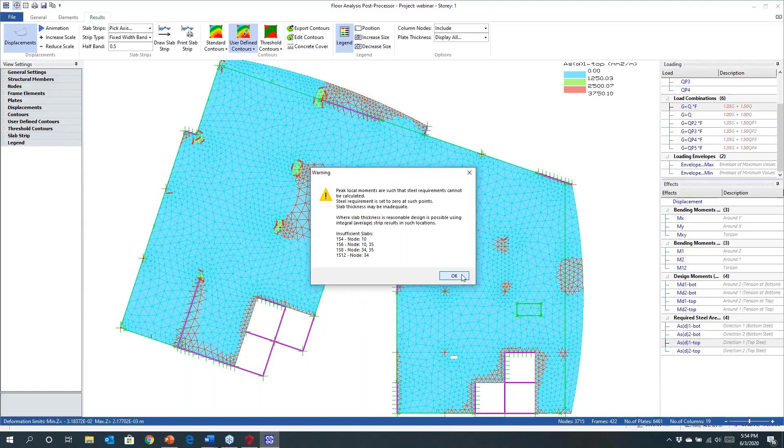But when it comes to looking at things in the top, you may notice that we've got a much higher peaks of steel that are occurring. Now I'll just turn off the envelope and let's just look at a combination. Okay, I'm just going to look at the standard contours.

But what you may notice that when you come in and interrogate the diagrams here, you'll notice that when you get close to column heads, you can see that the moments are peaking. As the moments peak, you obviously need additional steel across those zones.

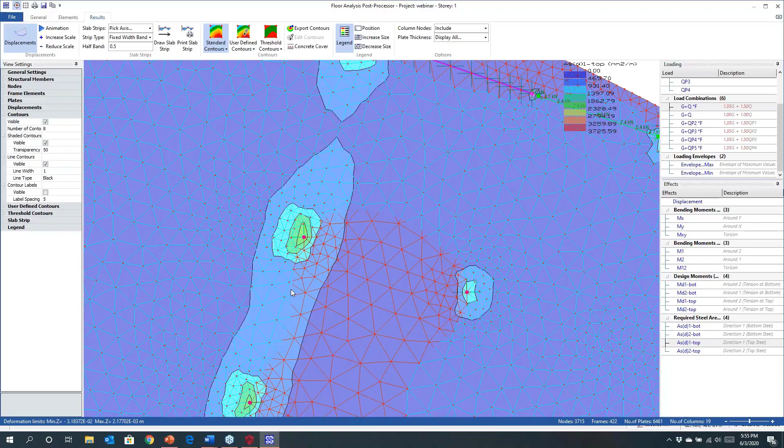Now, if I had to take the absolute peak, which is right at the point of, say, this column here, that may be very high. So you can see in this zone here, it's asking for something like 2,300 millimeters squared per meter. But the code generously allows you to average across those strip widths.

And this is what I was alluding to earlier, where there's an empirical approach that you can use to consider this. Now, what you will do is you will look at the spans that you have either side, and the code will provide you with guidance as to the strip widths that you need to consider for design across these peaks. And to do that within the software, we can come in here and set bandwidths.

Now, if this was a span of 8 meters either side, I may set a half bandwidth of something like a meter. Okay, I think in my situation here, I've got slightly less, but I'm going to take 750 millimeters either side of this column here, and this may be the maximum column head that I'm looking at for this zone.

I know that there's other peaks. These peaks are isolated to the walls in this scenario, but I'm just going to choose this, which may be the maximum in my model here. So I'm going to come and draw. I'm then going to come and choose to draw a strip.

Okay, and I can come and choose a strip, and I don't just need to go through one column. I could choose to interpolate across a number of column heads there, and I can then use this to start to look at what might be the effective design for the steelwork across those column heads. So here you can see it's creating our integral strip. Okay, and you can see the strip results that have been created here.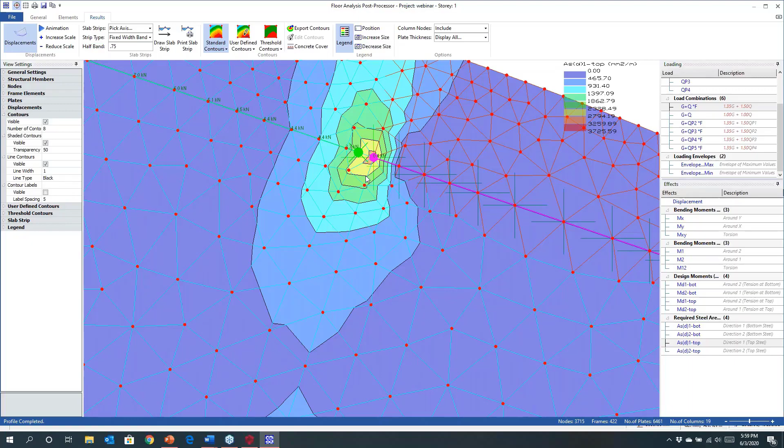By taking advantage of the integral strips, you can then plan out the reinforcement you may require in these zones. So that's one way in which we can interpret the design, and we can come up with a sensible design for looking at the flat slab.

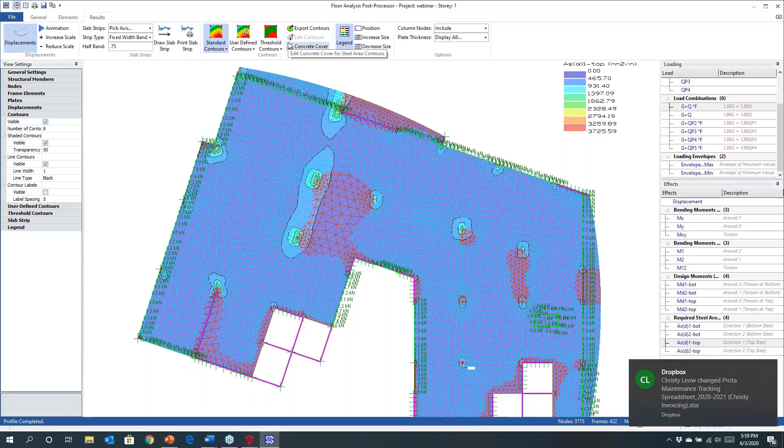So we can use area of steel contours, we can take advantage of integral strips, and we can also take advantage of user-defined contours, which we can extract back to our model for refinement as part of the detailing process. So I may at this point just be happy with that.

And I now want to come in and look at the model in more detail with respect to other considerations. So we may have designed our steel, we've got our baseline steels, we know what's in there, we know what's in the peak across the column heads, which is say 16s at 250.

I now need to come in and look at punching shear. In here we can come and select columns. You can choose the whole floor plate if you want to, but I'm just going to look at these as an example, and within the software we can ask the program to check for punching shear.

Now it's looking at the perimeter, and these are internal columns, so I'm going to check these as an internal perimeter. We can also check the column drop head panel perimeter, because locally within the drop head, as you get to the edges, you may have additional local shear stresses or changes in shear capacities there, which you may also want to check. So we can also consider this.

And I'm going to define in here the slab rebar that we have, so we have 16s spaced at approximately 250 as my maximum. We can come and set this, and I'll assume in both directions the values are the same. Let's just change this as well, and go for 250 or so.

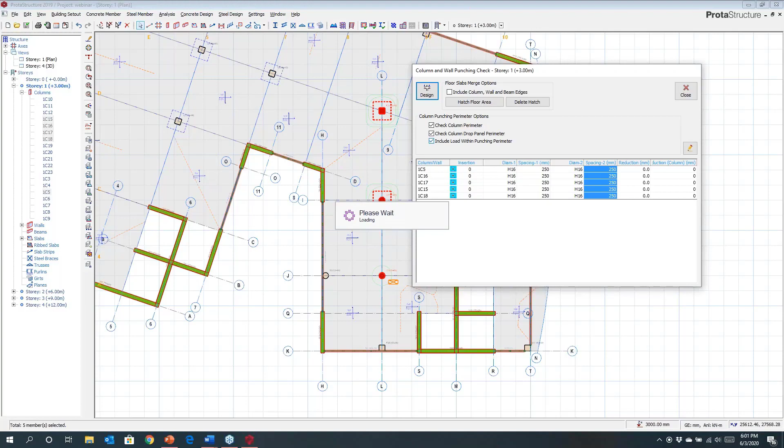Okay, so I've set these up, and then I can just ask it to design this. So it's now checking the design of those zones, and the software will at this point provide a report. ProtaStructure will generate a report now, and it will provide you with all the underlying checks for the punching shear. So we're doing a number of checks here.

So we're checking at the face of the loaded area, and depending on the code, we're also checking at either 1.5D or maybe 2D away from the face of the column. Now, earlier I mentioned that there are adjustments being made here to calculate our effective shear, and this is based on the biaxial moments that are also present in those columns, based off the frame action that may have occurred from the building analysis.

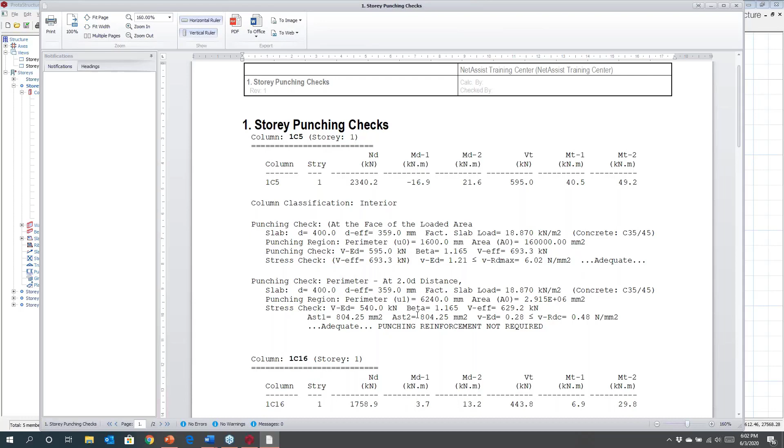And being able to mesh the building, mesh the floors within the building, and provide a comprehensive building analysis with all the localized stresses is also being taken into account here. You'll see that it's then checking these perimeters and ascertaining whether or not we need to provide any additional shear steel. So all these checks are done for those columns, and in this situation here, these have all passed, and you can see the detailed checks and code clause references there.

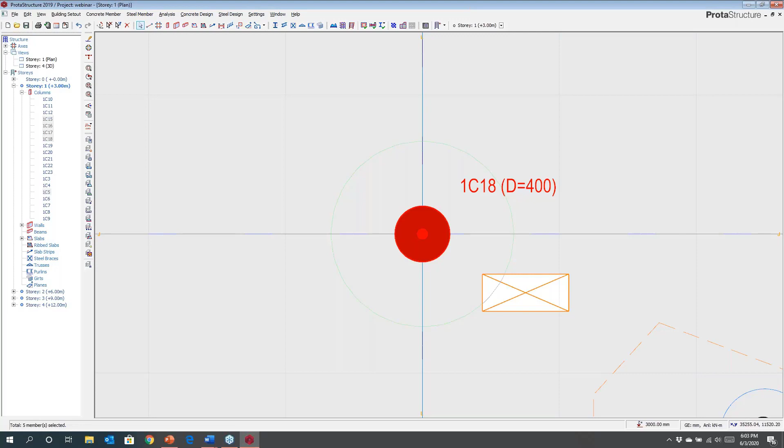Another interesting thing we've done here is that even when we have openings in the slab, we are adjusting the shear perimeters automatically, and we will reduce the shear perimeters here as well. Now if for this particular column I wanted to change that further, I can come in and manipulate it, for example using a larger perimeter or making a bigger reduction.

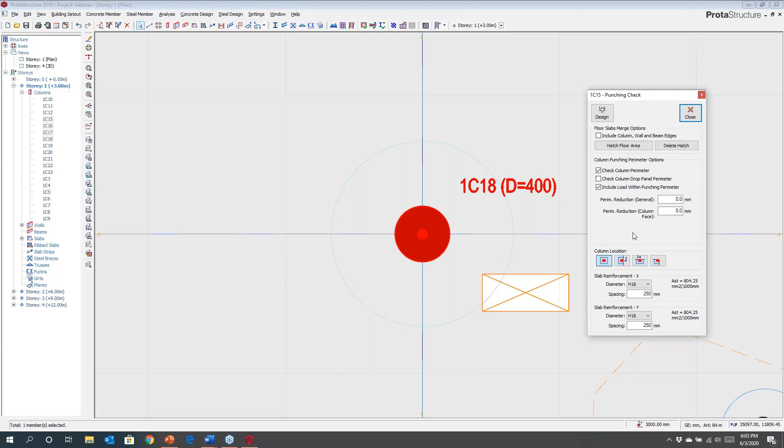Now what about other zones? Let's look at this edge column here. If I select the column, I can individually check it. I'm going to check this perimeter and look at the punching perimeter, and choose the edge location. Just be aware we're not automatically working out whether it's edge, corner, or internal - you need to do a little work to create these, so just choose the appropriate column location. You'll also predefine the steel provided locally - let's assume 16s at 200 or something - and then we can design for this perimeter.

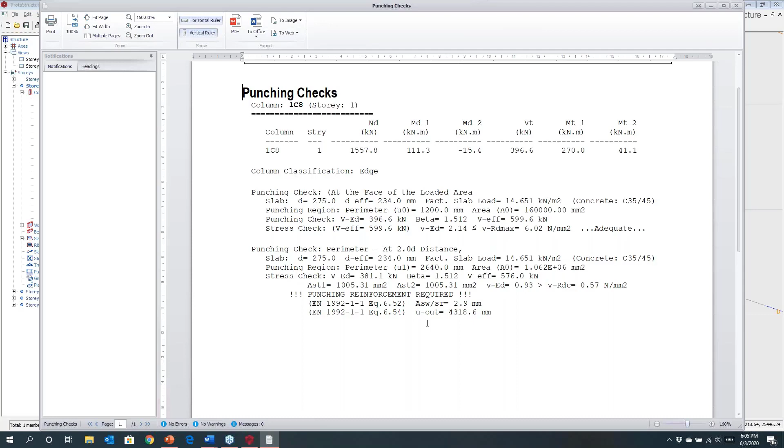What you might notice here is that this perimeter has not actually satisfied the code, and from the checks you'll see that in this locality I do need a bit of extra steel. We've defined the amount of additional shear steel you would need to provide, which could be in the form of links or studs, or you could look at increasing your longitudinal bars to see if that helps this pass. What we're doing is checking these perimeters in detail and providing localized requirements for that additional steel, with quite sophisticated checks being carried out to determine those parameters and perform those design checks.

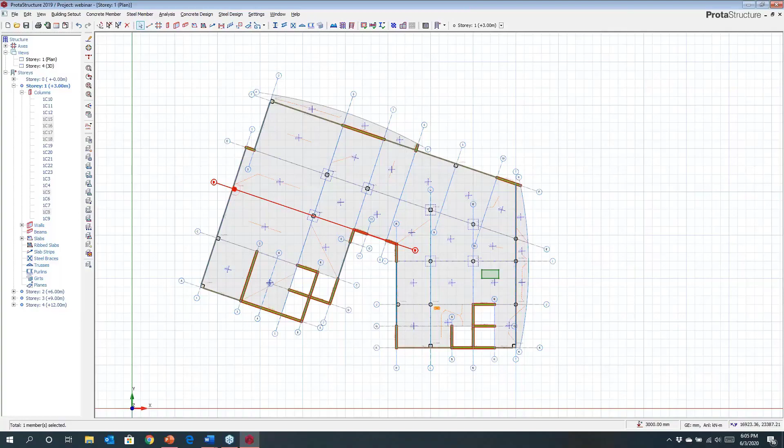So I wasn't going to go into a lot of detail today in terms of designing the whole building, but I wanted to give you a flavour and some insight into the type of considerations you need to be aware of if you're designing flat slabs, and all of this we can do within the Prota Structure model. So if you bear with me, I'm just going to conclude.

We have comprehensive treatment for the design of flat slabs within Prota Structure. Models can be easily created, as you saw, and you can make considerations for very irregular arrangements. You can introduce things like drop head panels if required - you noticed I put the panels in to suit the way I wanted to carry out my pattern loading. We will perform full FE analysis, which could be for the entire building, or you can look at it on a subframe basis for local treatment and maybe looking at long-term creep and shrinkage effects, which I covered.

Within this, we are making considerations for things like pattern loading, frame action with the entire model, where we're meshing the slabs together with the columns and walls and looking at the localized stresses and actions around those. We can make detailed considerations for creep and shrinkage - I took advantage of using integral strips to work out my maximums across the column heads, as well as looking at area of steel contours for defining rebar arrangements. And I concluded there with looking at the punching shears, which can also account for considerations for openings.

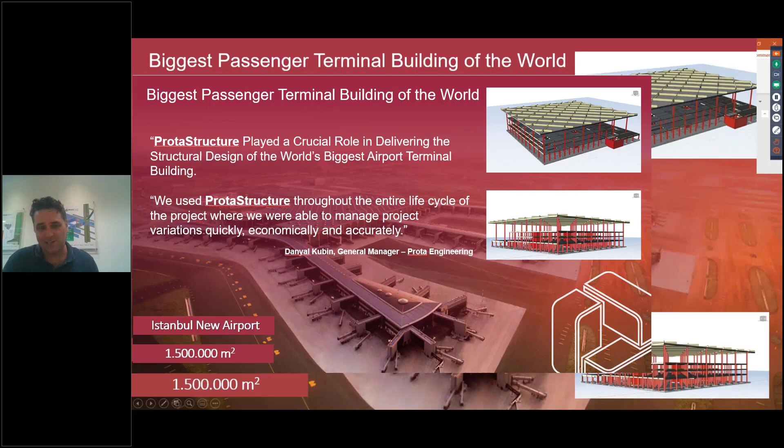Now just to conclude and give you some background, what I've shown you today has been used on numerous other projects around the world, and we've used it actively on some of our own projects. Here you can see we took advantage of this with the new international airport, as well as some of the universities we've recently designed.

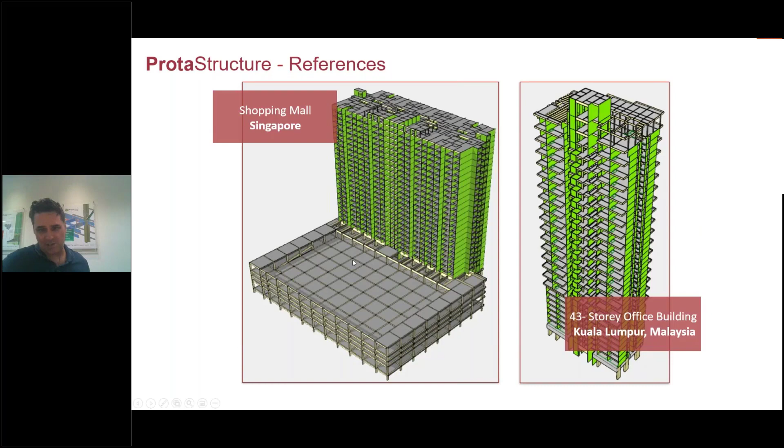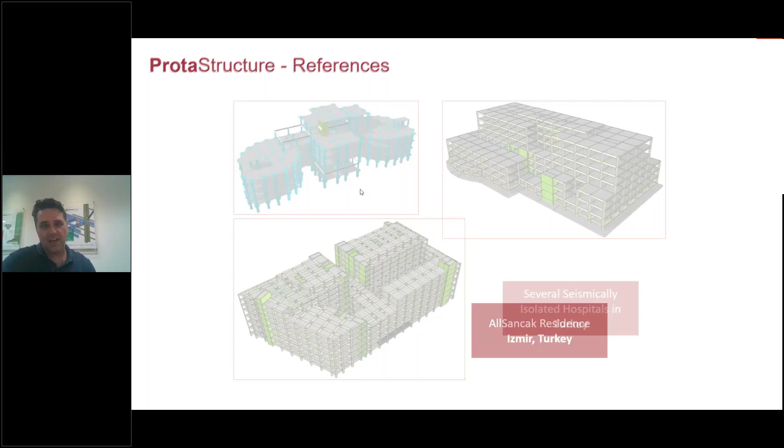You can see some of those models here where we've got flat plates, particularly for things like roofs that we've employed. Here's some other models, flat slab systems being used in Singapore. Here's another interesting project in Turkey where we've designed flat slab systems. And you can get into some really huge systems with things like transfer plates and the like.

We are obviously supplying software to a range of interesting businesses around the world. It really is a fantastic period for us as we grow to engage some of the other leading consulting businesses worldwide, as well as our fantastic user base, ranging from one-man bands up to some very eminent businesses.

I think the key behind the solution is that it's not just about building design. Yes, that's part of what we do, but our vision is that we're going end to end. So we're going from modeling, analysis, and design right through to full documentation, and that includes all the drawing management, drafting capabilities, and component design.

You may have seen that within earlier webinars with Prota Details, as well as being able to provide you right down to fabrication detailing, whether that's rebar schedules or steelwork fabrication detailing, breaking out things like connections and providing all the shop drawings. All this is part of the platform that we've been working very hard on over the years.

Now, I think increasingly we're seeing many of our clients starting to interact with other project team members, and BIM collaboration is also becoming increasingly important. This is also a key consideration in how we've developed the platform, being able to share that information out with others.